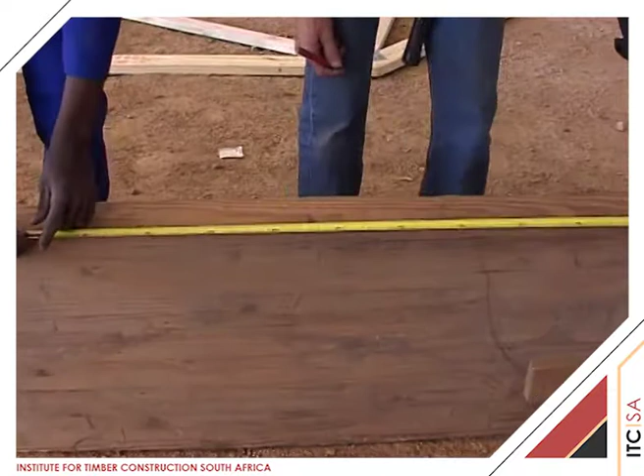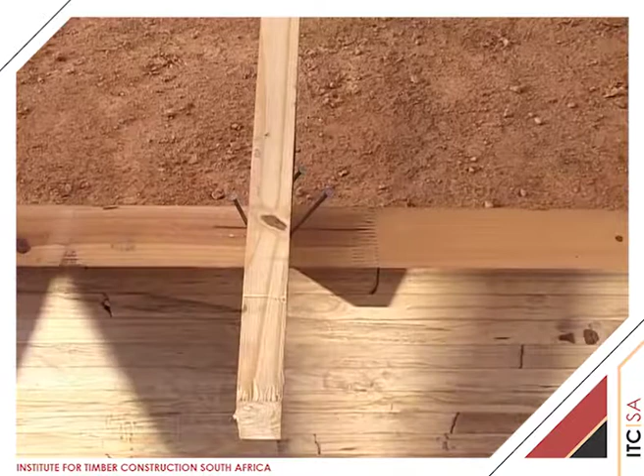Position the first truss on the wall plate on the mark indicated and nail on either side of the truss to avoid horizontal movement. Slide the truss until centrally located over the walls and then nail temporarily into position by skew nailing through the heel of the bottom chord into the wall plate.

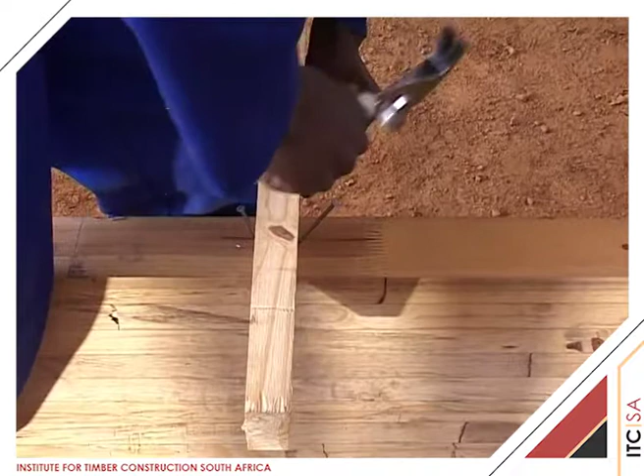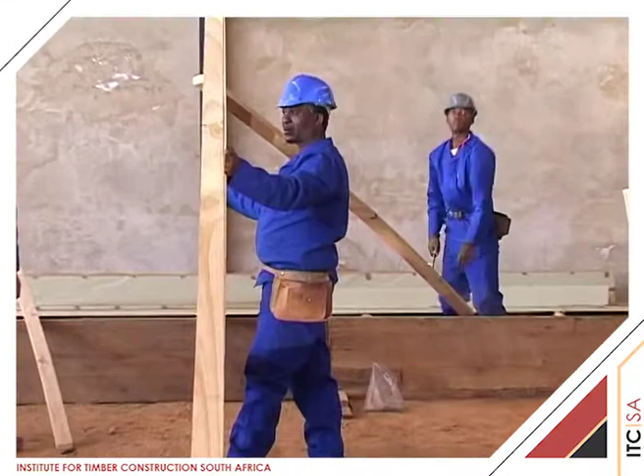Plumb the truss by using a straight edge and a spirit level, and then temporarily brace the top chord. Straighten the top chords by pulling a line from the heel to the apex.

Ensure the temporary bracing members are of size not less than 38 by 76 grade 5 and are nailed to wall plates with 2 wire nails.

When trusses are erected between gable walls, the first and last trusses are positioned 50mm away from the gable end walls. Trusses erected between gable walls must be stabilized by fixing a temporary bracing member diagonally across the webs for the first 3 trusses.

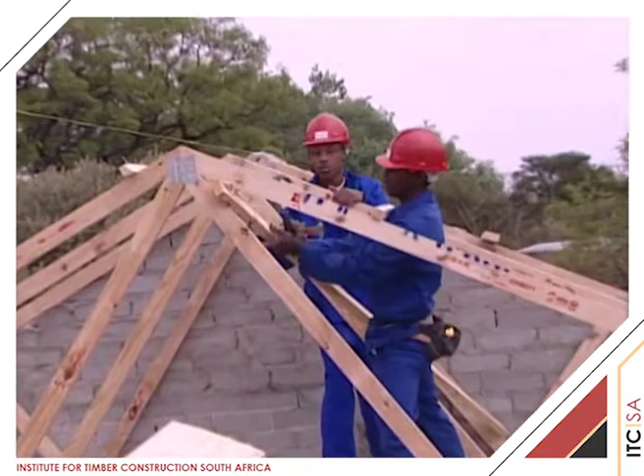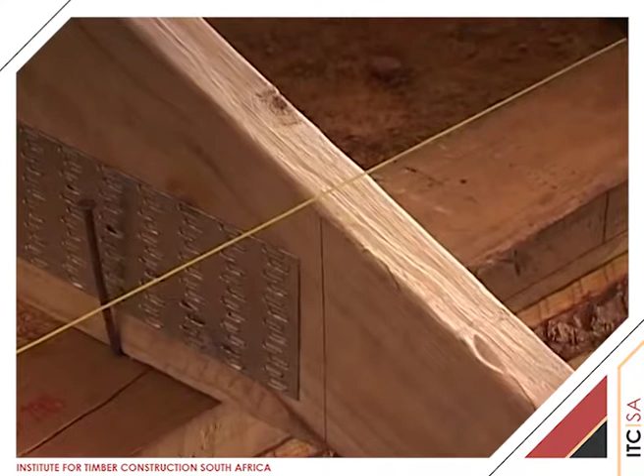Install a truss at the other end of the building on the correct mark and ensure that the heel end of the truss projects the same distance from the wall plate as the first truss. Then temporarily brace the truss using the same procedure as the first truss.

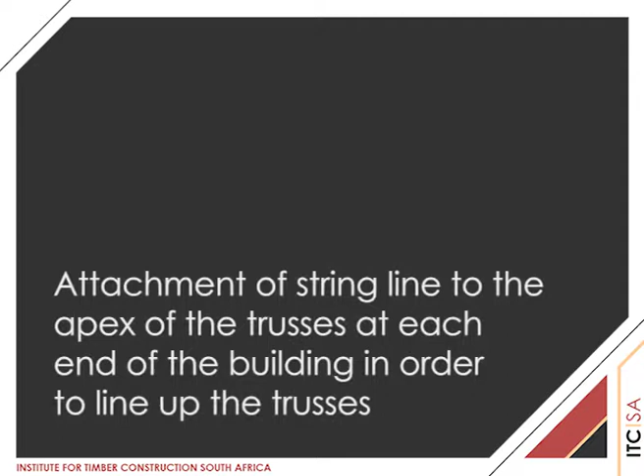Drive a nail into the apex of each truss of the first and last trusses, which have been placed into position, and pull a line firmly across the apex points between these 2 trusses.

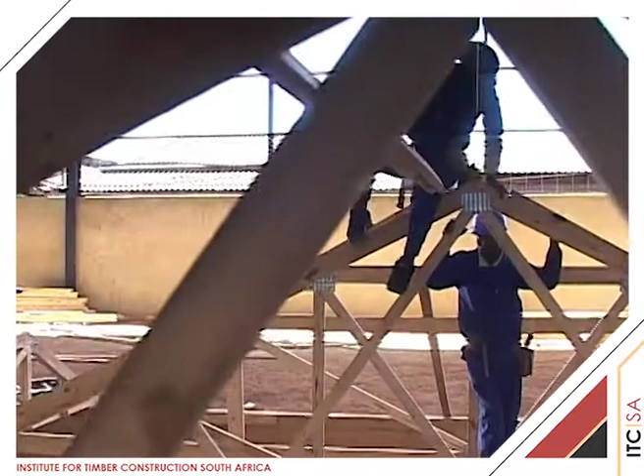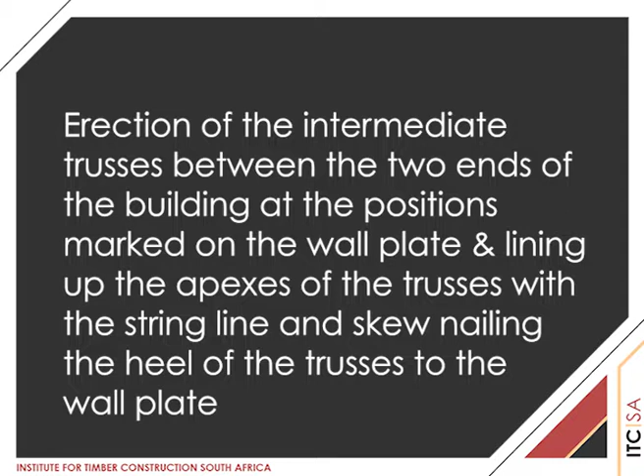Erect the intermediate trusses at the positions marked on the wall plates and ensure that the apex of each truss is directly under the line, and skew nail the heel onto the wall plate.

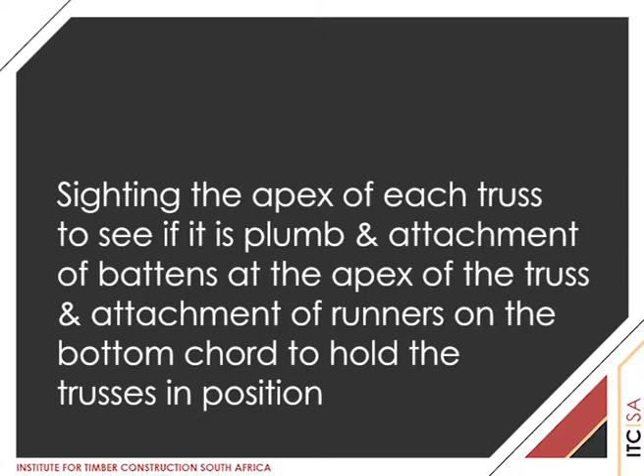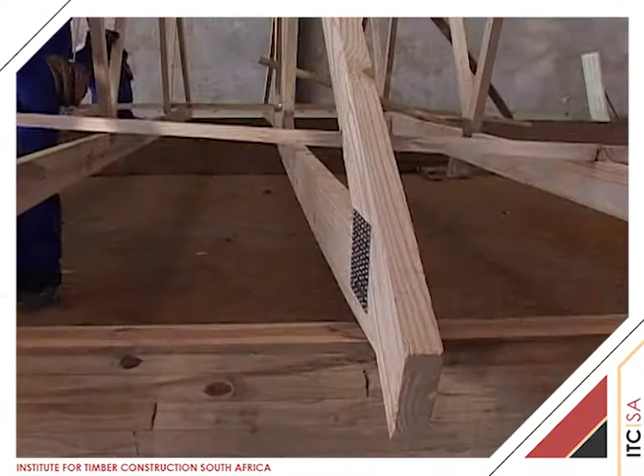Sight the apex of each truss to see that it is visually plumb at this stage. Then fix a batten across the top chords close to the apex, as well as a runner across the center of each bottom chord to hold the trusses in position.

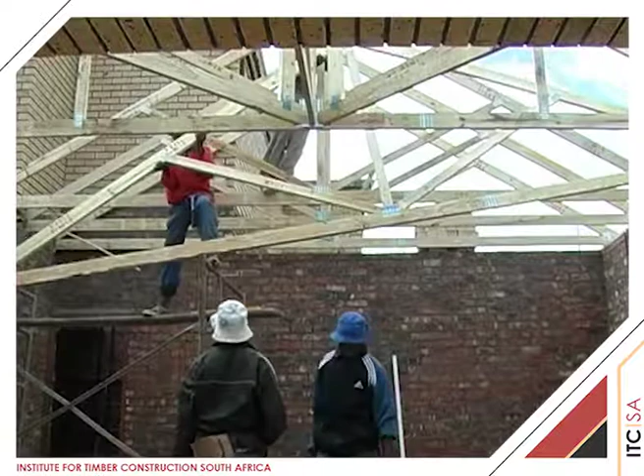Here you can see it on site.

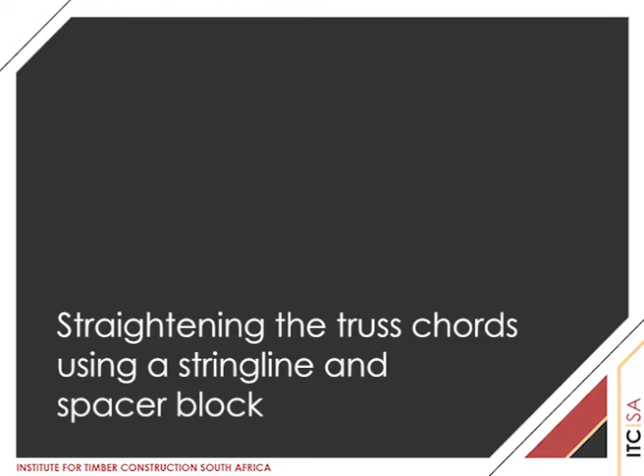We now need to straighten the chords of the trusses. We start with the bottom chords. Pull a line along the length of each bottom chord from heel to heel using spacer blocks between the line and the tie beam. Where the tie beam needs to be straightened, the nail holding the runner is released, the tie beam is pulled straight in line with the fish line, and the runner is nailed permanently.

A vertical line is marked on the side of the top chord of the first and last trusses at the heel points, and a nail is driven into the top chord of each truss adjacent to the mark. A line is now pulled tightly between these end trusses to ensure that all the chords at the heels are level.

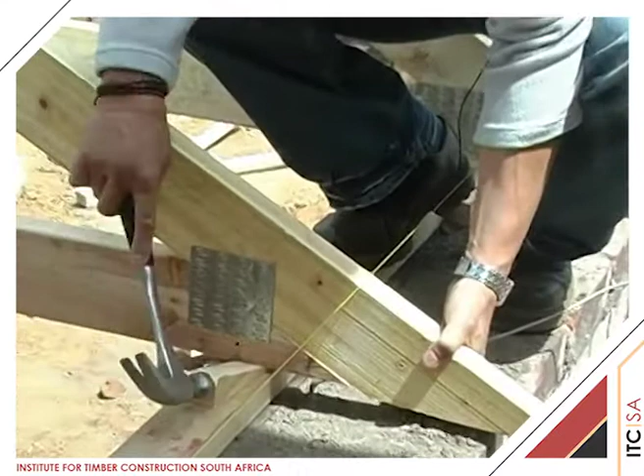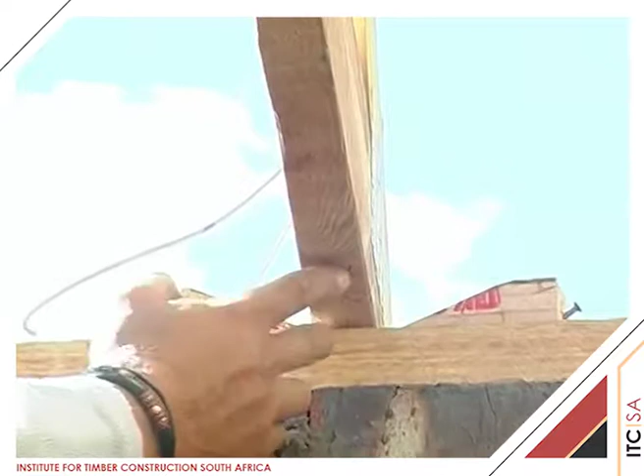Where the trusses are not level, it will be necessary to insert and nail wedges. It is important to fix wedges on both sides of the trusses to maintain plumbness.

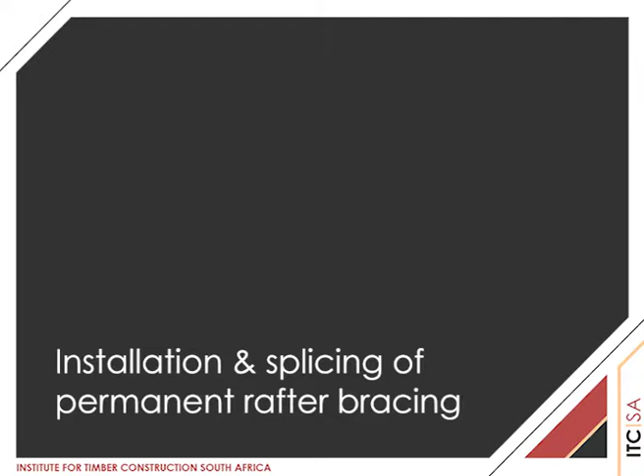We are now in a position to install the permanent rafter bracing. Note how unstable the structure is before fixing the bracing.

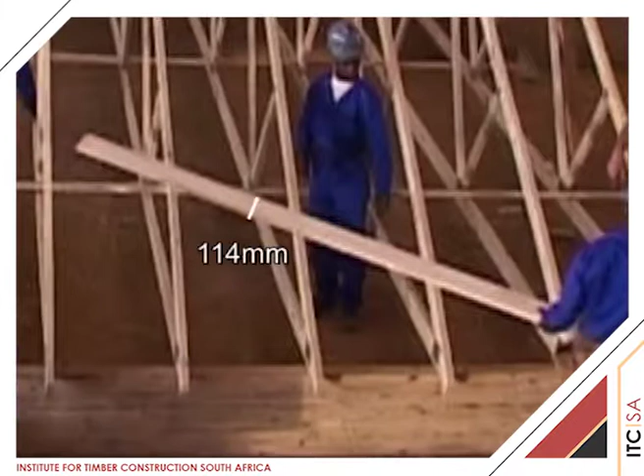We select the timber size and length specified. It will normally be of 38 by 114 grade 5, but may be 38 by 76 grade 5 if the truss span is less than 6.6 meters.

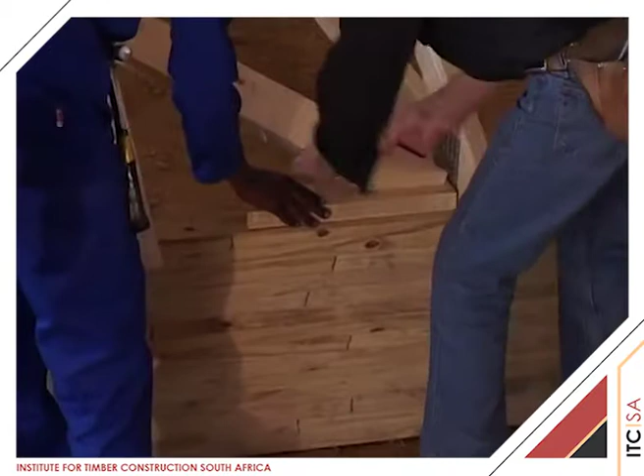The timber is placed over the chords and cut to the required length, and then positioned under the top chords and taken from the apex of the first truss to be used, as shown on the truss layout drawing, to the wall plates next to the last truss shown. This is at an angle of about 45 degrees on plan.

Where the length of timber supplied for the rafter bracing is not long enough for the requirements, it can be spliced in order to achieve the required length, as shown in the detail on page 42 of the Volume 2 Handbook.

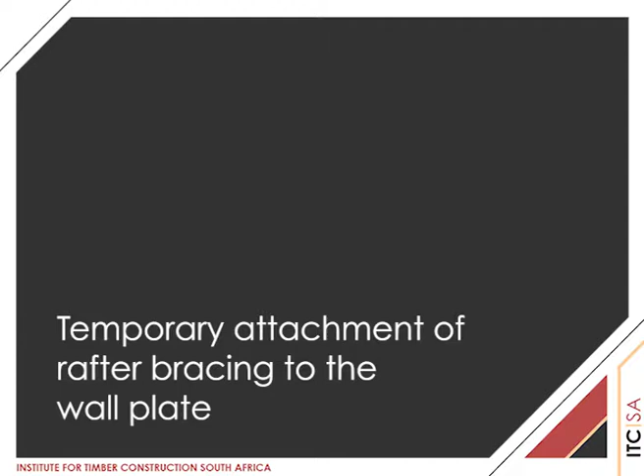The bracing member is nailed temporarily onto the wall plate and held at the apex of the first truss. Permanent fixing onto the wall plate will be dealt with later.

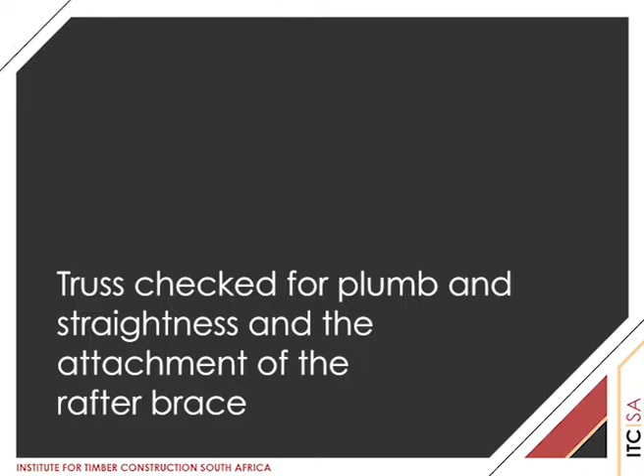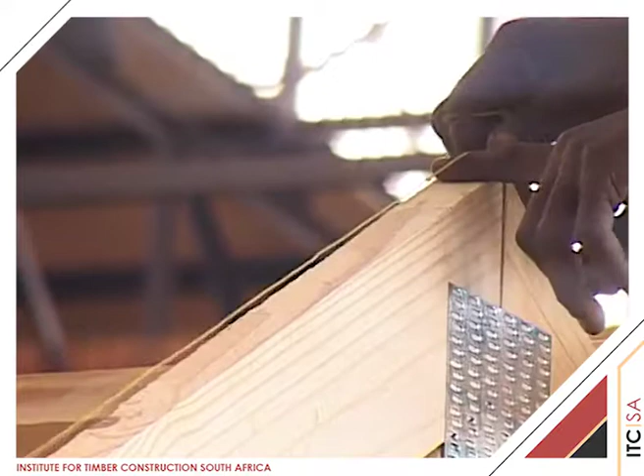Each truss is now checked out for plumbness using a straight edge and spirit level. The rafter brace is nailed at the apex of the first truss. The rafters are now checked for straightness by pulling a line from the apex to the heel.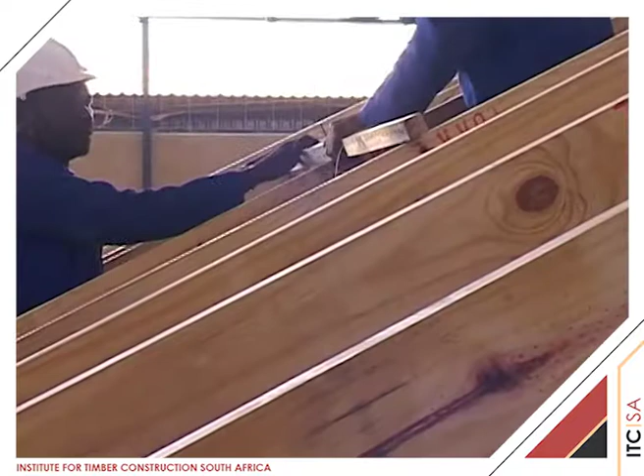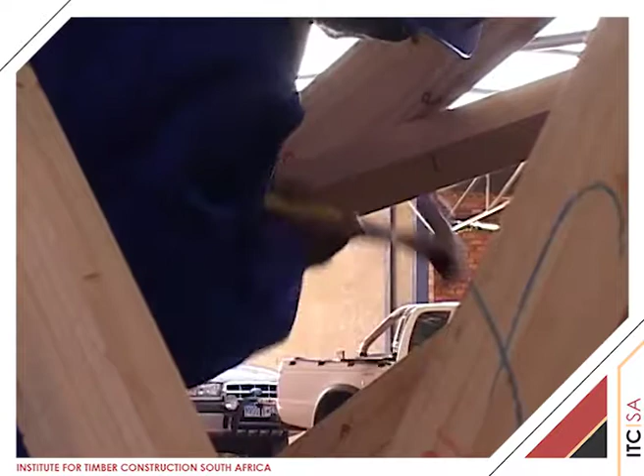If these need to be adjusted, the nails holding the temporary battens are released, the rafters straightened, and the battens re-nailed. The rafter bracing member is then permanently nailed to the underside of each rafter with the required number of nails, 3 for 114 timber and 2 for 76 timber.

Permanent fixing of the rafter bracing to the wall plate is of utmost importance. For trusses of spans less than 6.6 meters, the timber bracing members are nailed securely to the wall plate using 3 number 100mm nails.

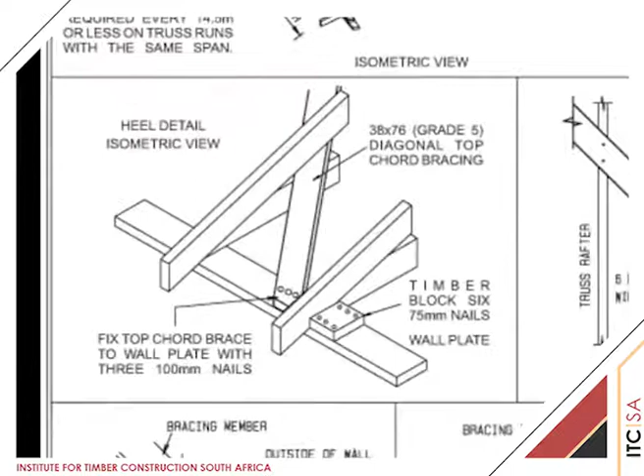A block of timber approximately 150mm long is placed against the heel on the opposite side of the truss and nailed to the wall plate using 6 number 75mm nails, all as shown in the detail on page 42 of Volume 2 Handbook.

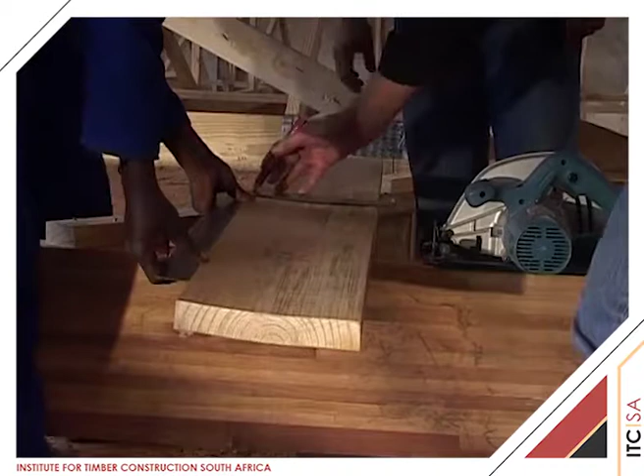For truss spans longer than 6.6 meters, the bracing member has to be fixed at the wall plate using a shelf brace. The shelf is of timber size 38 by 228 and is cut precisely to fix between the truss spacing. The shelf is placed over the 38 by 114 rafter bracing as close as possible to the wall plate. The shelf is held in position by nailing through the rafters on either side.

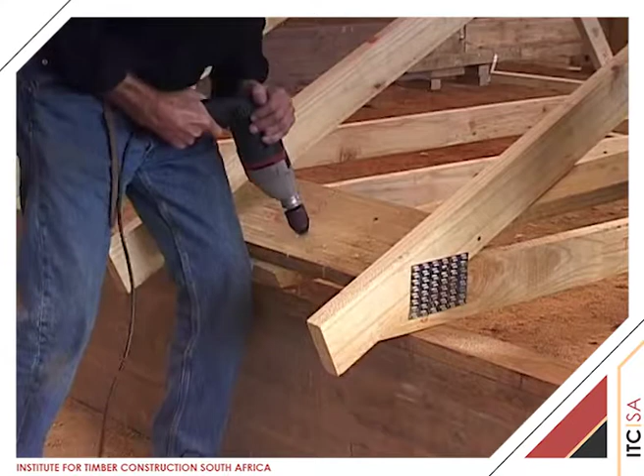Two 12mm holes are then drilled through the shelf and the rafter bracing to accommodate the 12mm bolts, washers and nuts which will secure the bracing.

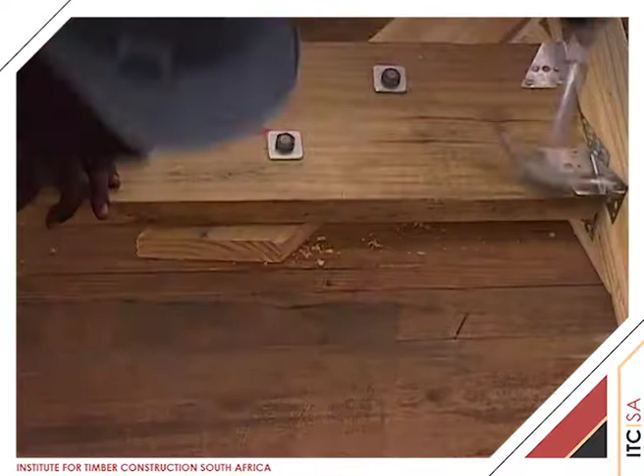The shelf is secured to the rafters with one pair of hurricane clips fully nailed with clout nails into the rafters on either side of the shelf and onto the shelf itself. Timber blocks are nailed into the wall plates on either side of the trusses where the shelf occurs, using 6 number 75mm nails to each block.

This detail appears on page 44 of Volume 2 Handbook.

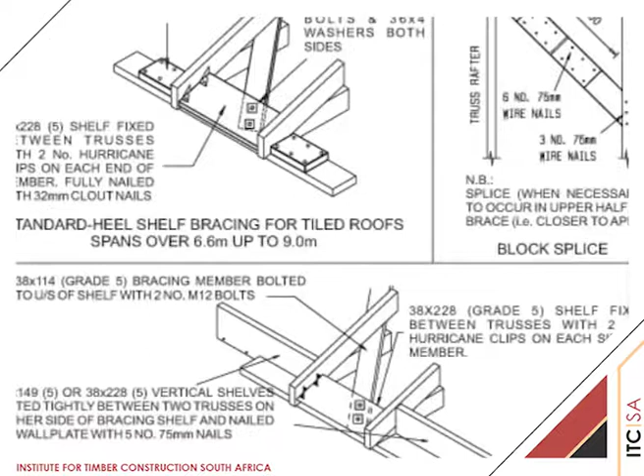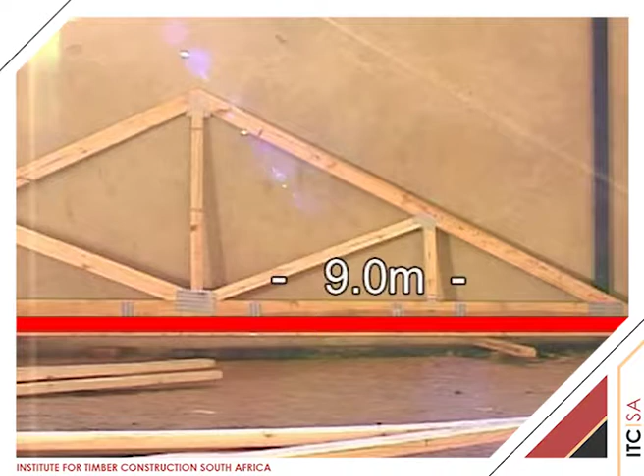Where the truss spans are over 9 meters, it is necessary to use a bracing frame as a stiffener on tiled roofs. The fixing detail for this frame is shown on page 52 of Volume 2 Handbook. Select the trusses shown on the truss layout which are to be used for the frame.

Then fix a continuous 38 by 38 bearer nailed with 75mm nails onto the sides of the rafters at 300mm centers and 38mm below the top of the rafters. These bearers are painted green as shown on the model and again referred to on the site installation in green in order to more easily associate with site procedures.

The frame is painted blue on the model and is shown in the finished position on the site in blue. The frame is installed by hoisting it onto the roof and placing it onto the 38 by 38 bearers, and then sliding it until the frame is adjacent to the apex of the roof.

The frame for the other side of the truss is installed and the two frames are located together at the apex. The frames are then nailed into the rafter sides with 75mm nails at 300mm centers.

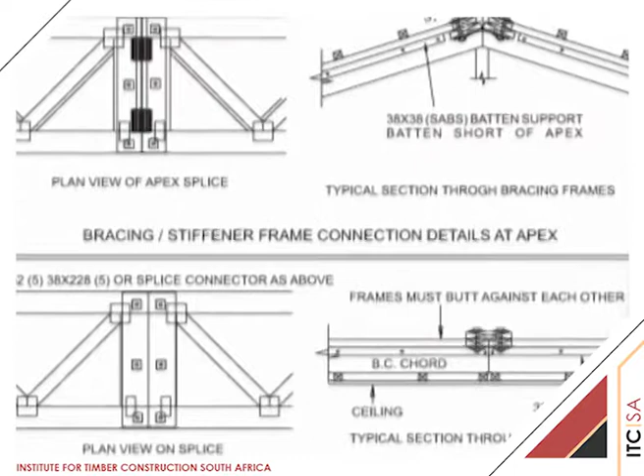The two frames are then securely fixed together at the apex by winding a bracing strap firmly around the two frames and nailing the strap into the frames. An alternative method of connecting the frames is by bolting two pieces of 38 by 152 timber which have been plated together, as detailed on page 53 of Volume 2 Handbook.

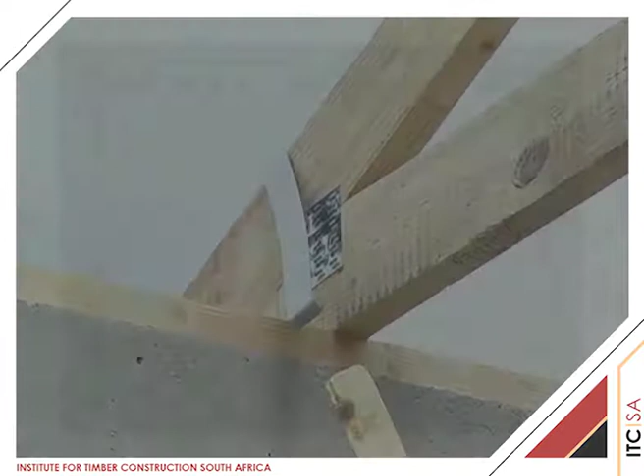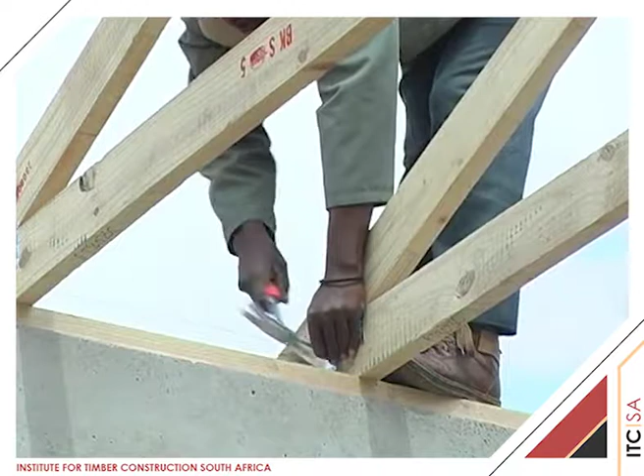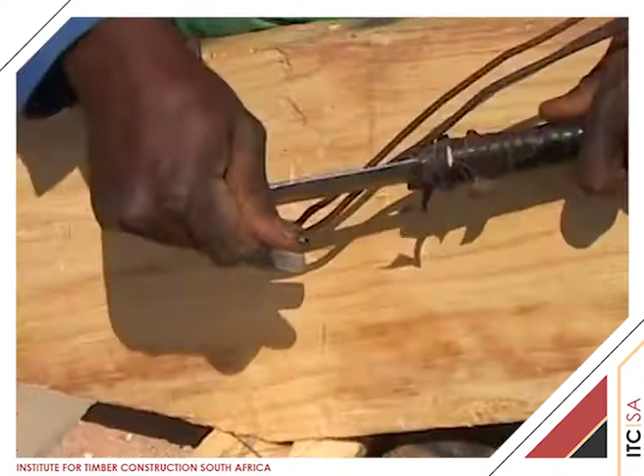The trusses must be permanently tied down onto the walls by firmly pulling the galvanized straps or the wire ties over the rafters of trusses and nailing the straps into the opposite sides of the rafters. Or where wire ties are used for concrete tiled roofs, a nail is driven into the side of the rafters at the heel and the wire is pulled over the rafter and twisted around the nail to firmly hold the truss down and prevent any uplift.

The tiling battens are now fixed onto the truss rafters. Measure and mark 25mm down from the apex of the first and the last trusses, pull a chalk line over all the trusses and strike the position of the apex battens.

At the lower end of the trusses we fix a batten referred to as a plaster batten. The position of this batten is marked by using a spirit level held vertically against the outside of the exterior wall and a mark made on the top of the first and the last truss rafters where they abut the level.

A chalk line is now pulled across all the trusses and the position of the plaster batten is marked on each truss. The plaster batten is nailed above the chalk mark onto every rafter with a 75mm nail. The roof erected in the workshop will have no overhangs, so the plaster batten in this instance is also the tilting batten. The tilting batten is of 38 by 50 section and is fixed standing 50mm high, so that the first course of tiles is raised to the same plane as all the other courses.

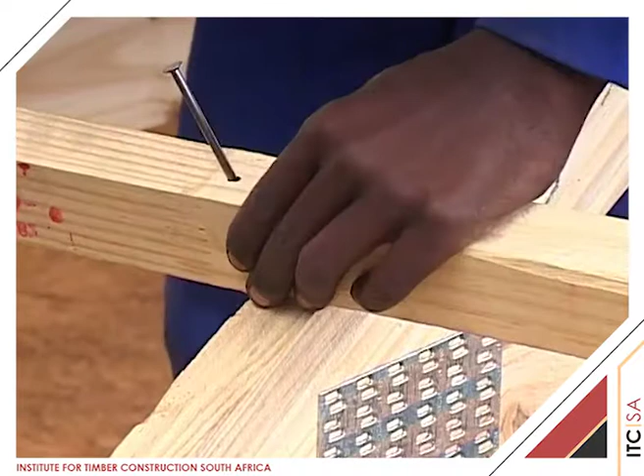Nail the plaster batten above the marked line. Now measure the distance between the top of the plaster batten and the chalk mark at the apex batten along the length of a rafter.

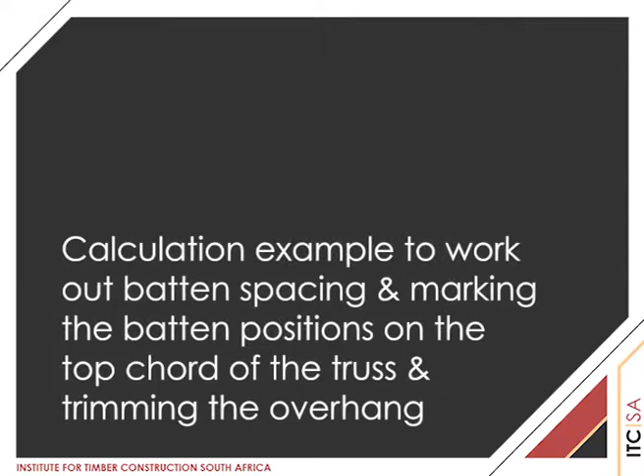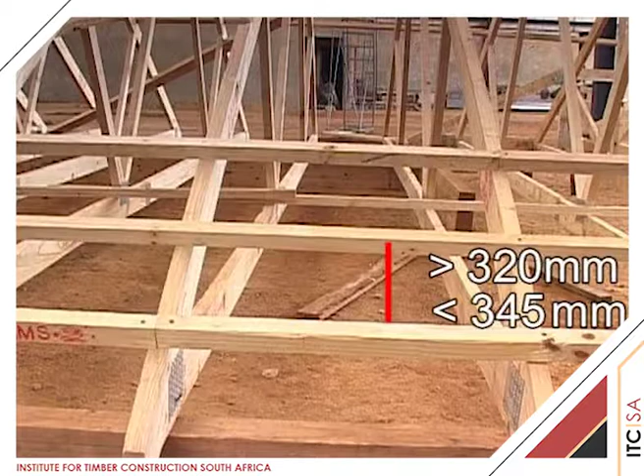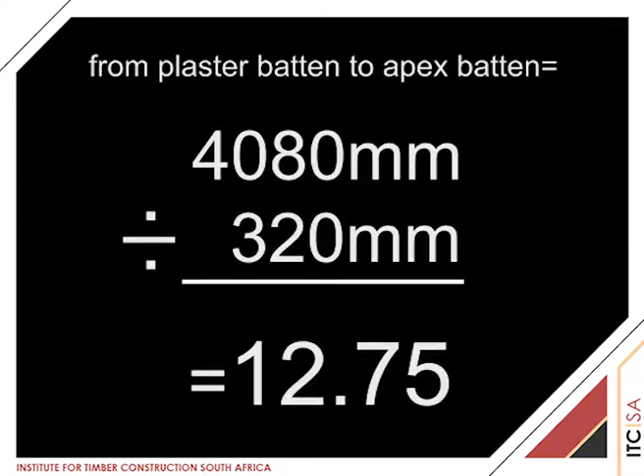The batten spacing for the cement tiles should be approximately 320mm, but not more than 345mm centers. In this case, the rafter length measures 4080mm. We divide this dimension by 320mm to achieve a spacing. The answer is 12.75. This means that we will need either 12 or 13 batten spacings.

Divide 4080 by 12. This equals 340mm, which falls within the tolerance of maximum 345 spacing. So we accept the batten spacing of 340mm.

The first and last trusses are now marked along the length of the rafters from the apex batten. Mark at 340mm centers in order to achieve equal spacings of the battens. Each rafter is now marked by striking the chalk line across all the rafters.

When an overhang is required, the plaster batten will be a 38 by 38 member. The batten spacing, calculated previously, is now measured downwards along the overhang from the plaster batten, depending on whether the overhang is for one or two tiles.

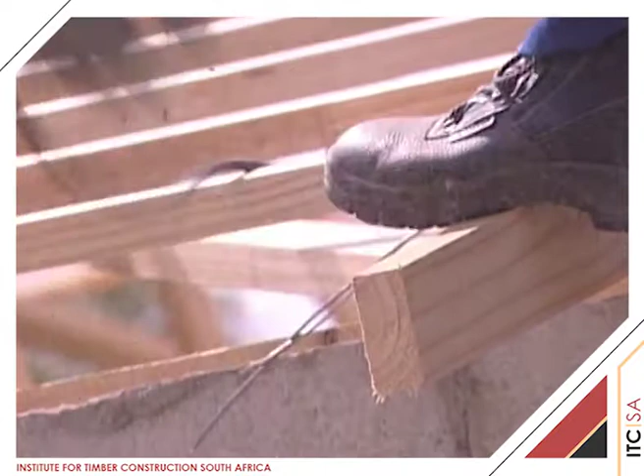Measure the length of the required overhang. Trim each overhang to length and fix the 38 by 50 tilting batten placed on end and fixed flush with the edge of the overhang. The 38 by 50 tilting batten is always the lowest batten. All the battens are now nailed onto each rafter above the chalk lines.

Do not splice battens immediately above a previous splice. The splice can only occur on the same rafter after at least 3 batten intervals. Battens must span over at least 3 rafters.

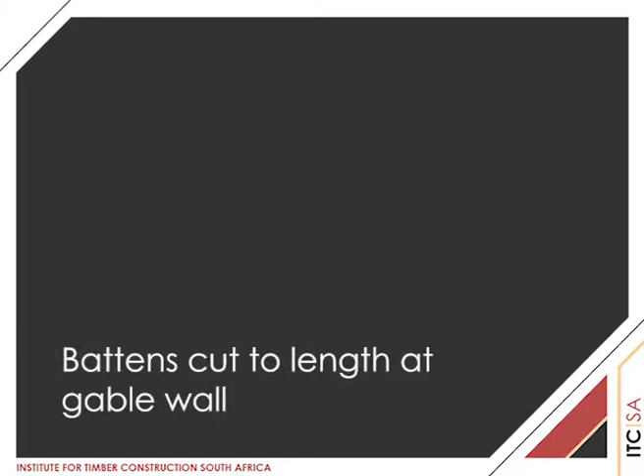The battens must be cut to length at the gable ends to suit the required finishes. The tilting batten must not be cut.

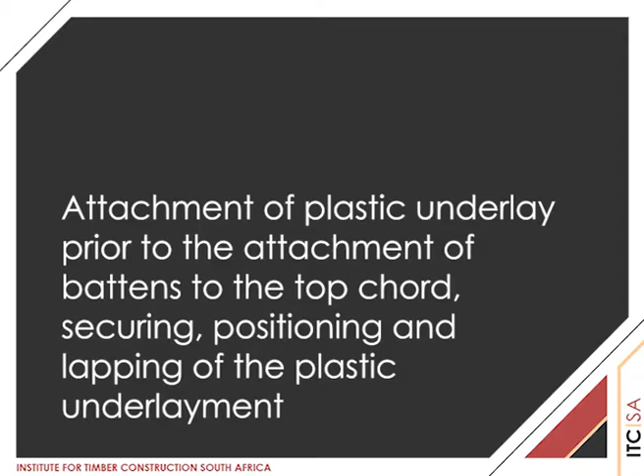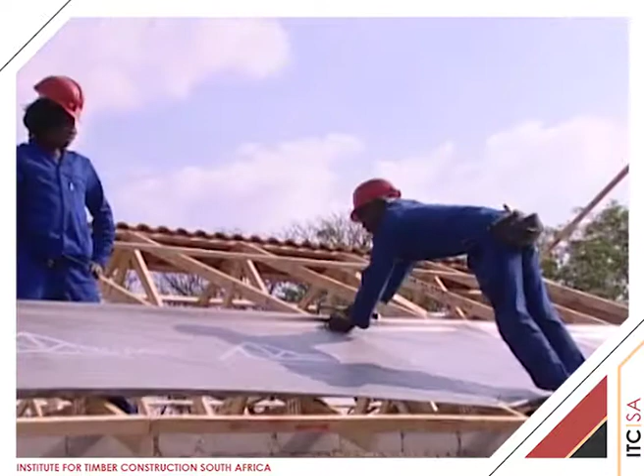Where plastic underlay is required on the roof, the sheeting must be fixed horizontally over the rafters prior to fixing of battens. The underlay is secured with clout nails to the center of each rafter, starting by protruding 20 mm beyond the position of the plaster batten.

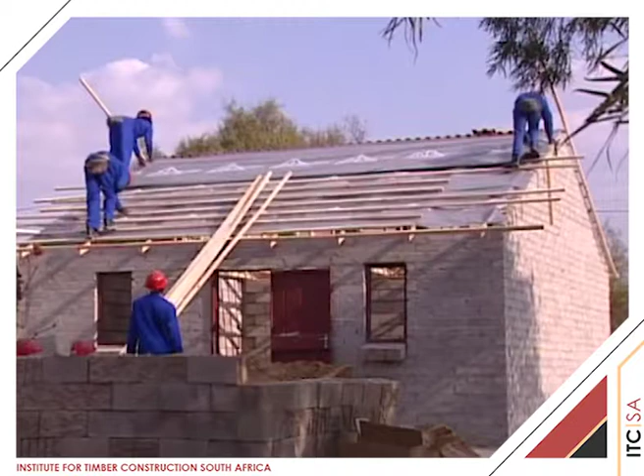The horizontal and vertical overlaps shall be not less than 150 mm at all laps. The vertical overlap must occur over a rafter.

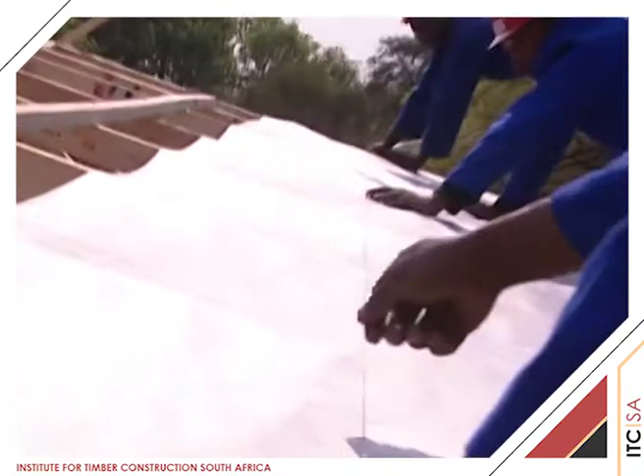Using a chalk line, we mark the batten centers onto the sheeting at the calculated batten spacings. The battens are then nailed into the rafters over the underlay.

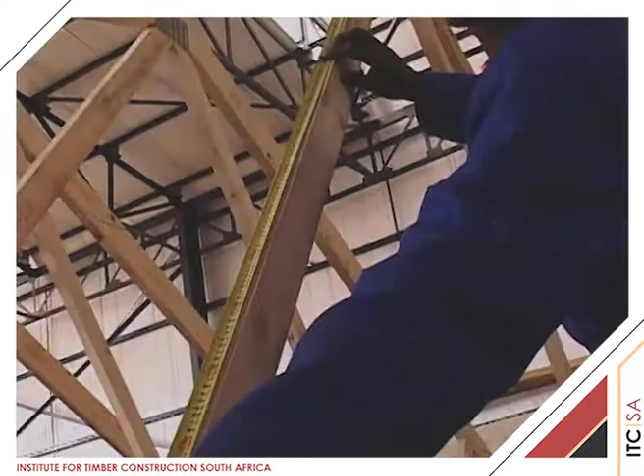Where the truss design requires web runners, these 38 by 76 continuous members are nailed onto the center line of each specified web, using 2 75 mm nails at every connection.

The runners are cross-braced in the bracing bay shown on the layout drawing. Cross-bracing is fixed diagonally at approximately 45 degrees across 3 trusses, that is over 2 bays, on the opposite side to the web runner, using 2 number 75 mm nails at each connection.

The design details and cross-bracing are all indicated on pages 56 and 60 of the Volume 2 Handbook.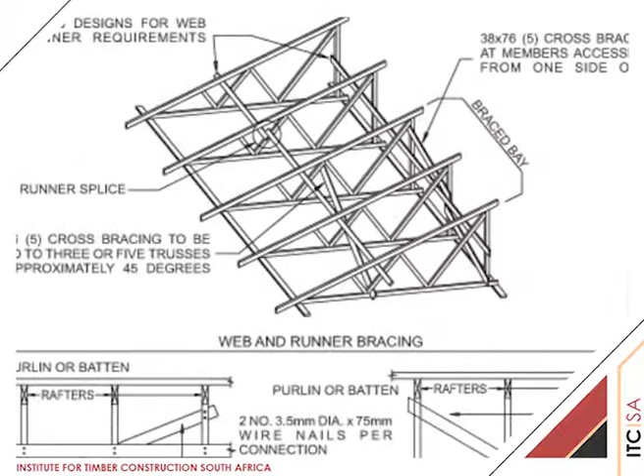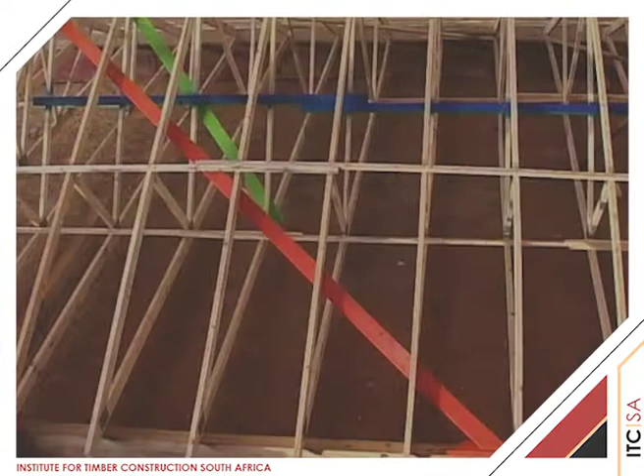In the picture you see, as well as the drawings that follow, the runner is coloured blue, the cross-bracing shaded green, and the permanent top chord bracing is coloured red for reference purposes.

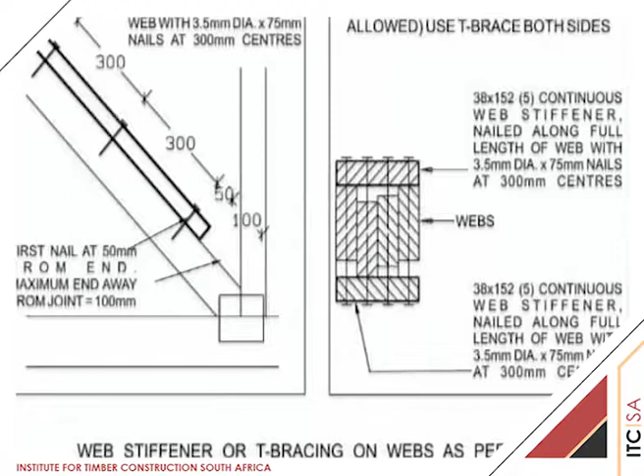A web stiffener or T-bracing is used for lateral restraint of webs where less than 3 trusses require this form of bracing. Page 61 of the Volume 2 Handbook clearly shows the sizes of timber to be used, as well as the fixing method of the T-bracing.

The web to be stiffened is measured and the dimensions of timber to be used is cut to length.

On the roof being erected, a 2-member girder requires a web stiffener. A 38 by 152 grade 5 member is cut and fully nailed along the length of the web with 75 mm nails at 300 mm centers and nailed into both webs of the 2-ply. Here it is shown in green.

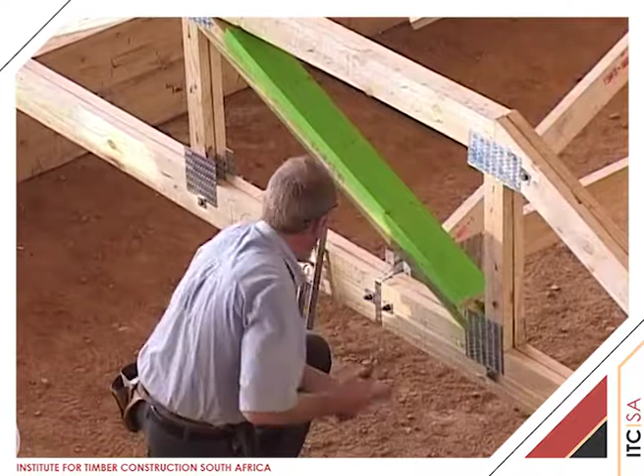The details for the bottom chord runners are shown on page 53 of Volume 2 Handbook. Bottom chord runners and cross bracing are fixed permanently to bottom chords of sheeted roofs and for tiled roofs where no ceiling is installed, or where the ceiling is suspended from the bottom chords, that is, not fixed directly with brandering to the underside of the bottom chords.

The positions of the bottom chord runners will be indicated on the layout drawing, and the cross bracing will occur in the braced bay. Runners are of 38 by 76 grade 5 members, nailed continuously over the top side of the bottom chords of each truss, using 2 number 75 mm wire nails at every connection.

These runners are cross-braced with 38 by 76 grade 5 timber fixed diagonally across the bottom chords at approximately 45 degrees between the runners, using 2 number 75 mm nails at each connection.

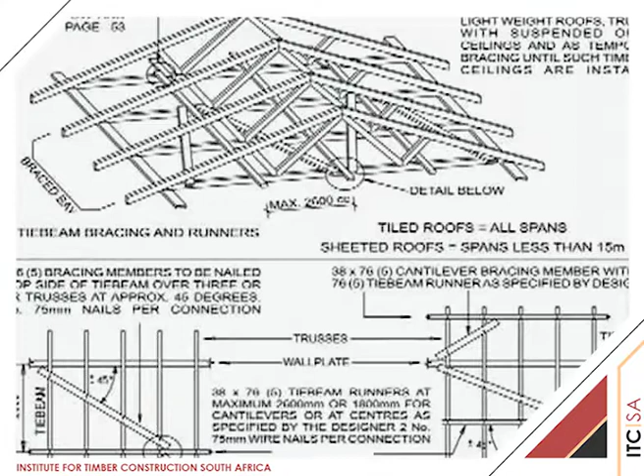For roofs which are covered with metal sheeting or cement fibre sheets, we use 50 by 76 purlins, which are fixed to the rafters on edge and securely fastened down using hurricane clips or wire ties, all as detailed on page 8 of Volume 2 Handbook.

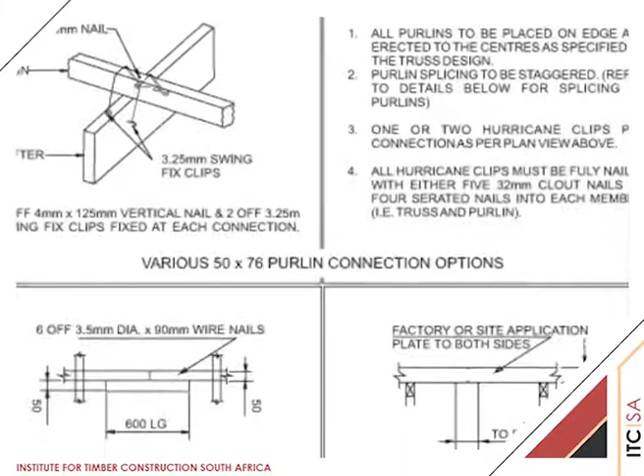The procedure for erecting of the trusses is the same as that for a tiled roof.

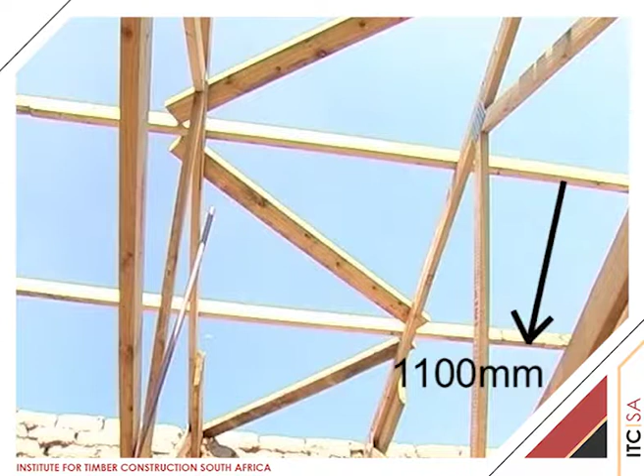The maximum purlin centers, unless specified differently by the designer, are usually about 1100 millimeters, and the spacings on the rafters for each job will be equally spaced at these maximum centers by dividing the rafter length by 1100 millimeters.

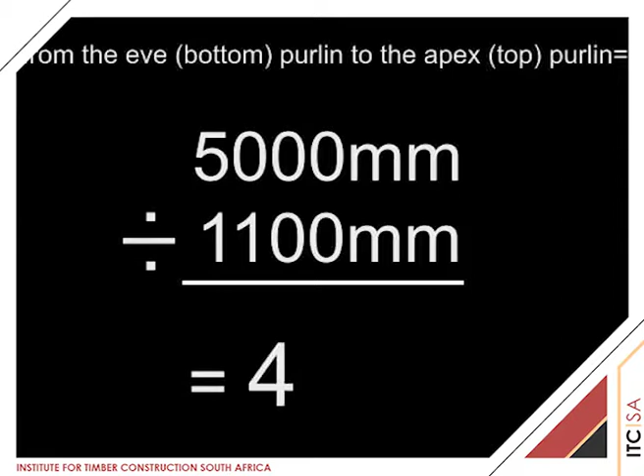For example, a 5-meter rafter length is divided by 1100. The answer is 4.54, this will require 4 or 5 purlins. 4 spaces will be 1250 millimeters, this is greater than the maximum 1100. Therefore, 5 spaces will be required with purlins at 1 meter centers.

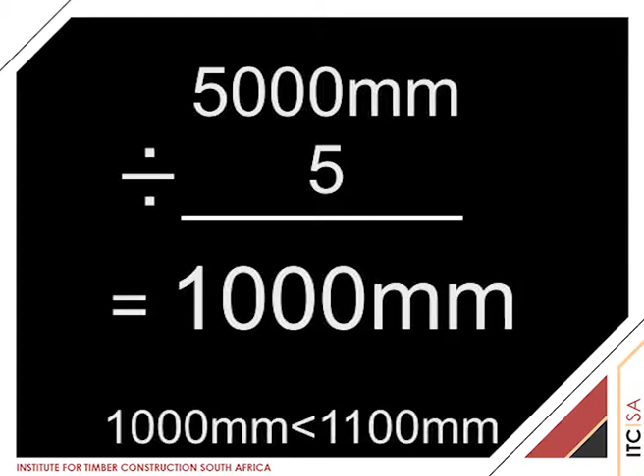Top chord bracing for a sheeted roof is fixed according to the detail found on page 50 of Volume 2 Handbook.

The 38 by 114 grade 5 members are cut to length and nailed to the top of the rafters alongside the purlins in a zigzag pattern at about 45 degrees along the length of the rafter. They are nailed at each connection with 3 number 75mm wire nails.

Bracing frames for sheeted roofs are only required for spans exceeding 15 meters or where specified by the designer. All other runners and bracing required for a sheeted roof are fixed in a similar manner to those for a tiled roof and are installed where the design requires.

Once all bracing members are installed and the rationally designed roof has been inspected and signed off by the appointed engineer, the roof tiles or roof sheeting can be fixed onto the battened or purlined roof.